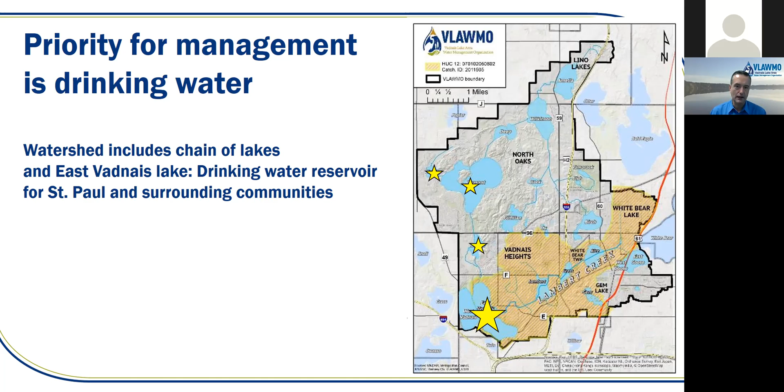The key priority for the Lambert Lake subwatershed, as you can see, that's located in the brown part, about the lower third of our watershed. It's called the Lambert Creek subwatershed. And really the priority for this entire management area is drinking water. The star that you see there is East Vadnais Lake. It is the reservoir that the St. Paul Water Utility draws their water out of for drinking water for 450,000 people in the St. Paul Water Utility area.

And because of that, we've really worked over the last several decades to do multiple high impact regional projects, including multiple reservoirs that we will show you in a few slides, as well as other rain gardens, other treatments in an innovative way related to shoreline and stream banks.

The Lambert Lake project was a multi-purpose partnership project, including partners, including the city of Vadnais Heights, SEH Engineering, University of Minnesota, Pollution Control Agency, Minnesota Department of Natural Resources, and St. Paul Water Utility.

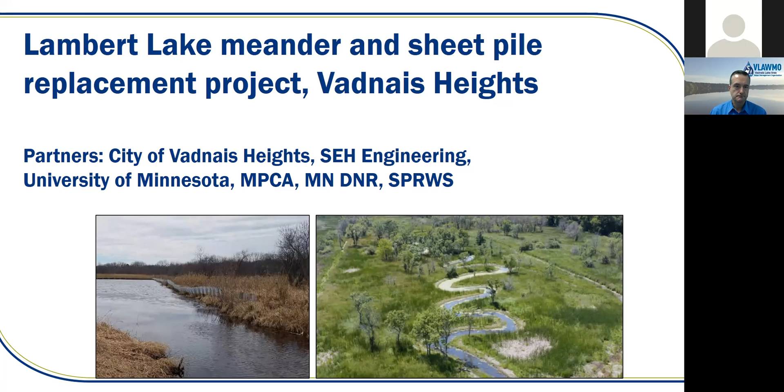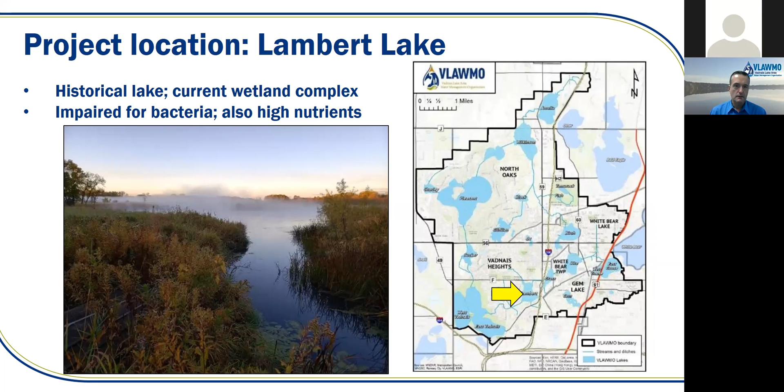The project location you can see on this arrow is about a quarter square mile lake called Lambert Lake. It's the last stop about a mile away from that East Vadnais Lake, and is really a creek that is also a ditch. So we have not only a creek, but we're managing it as Ramsey County Ditch 14 as well. We've got huge floodplain areas in this location, as well as a drainage, need to manage it as a drainage ditch, and of course as a water quality opportunity as well. Next slide.

You can see this is really the key storyline for this project: this is the last stop for a multi-purpose regional project before the water is discharged to East Vadnais Lake for drinking water. The creek is impaired for bacteria and also has very high nutrient loads. And we knew through multiple regional planning over the last several decades that this was the last stop for treating water before it got to that reservoir.

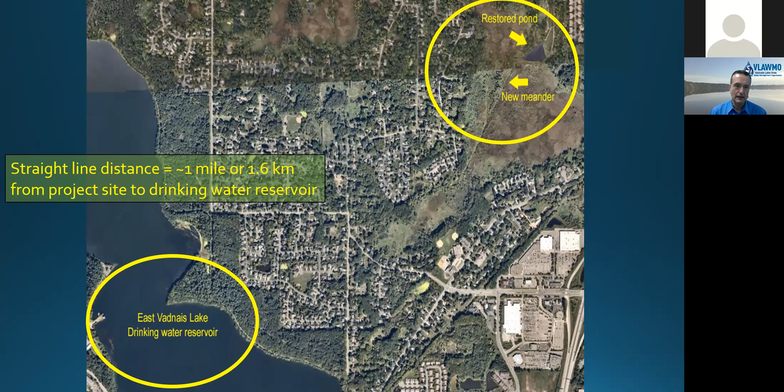And we really needed to attempt to do a project that treated the water quality, managed the floodplain, provided drainage for the upstream residents. And that's what we're so excited to share with you today. So now Dawn is going to talk about some of the project planning design, and then Emily will talk about implementation, and I'll come back to wrap it up at the end.

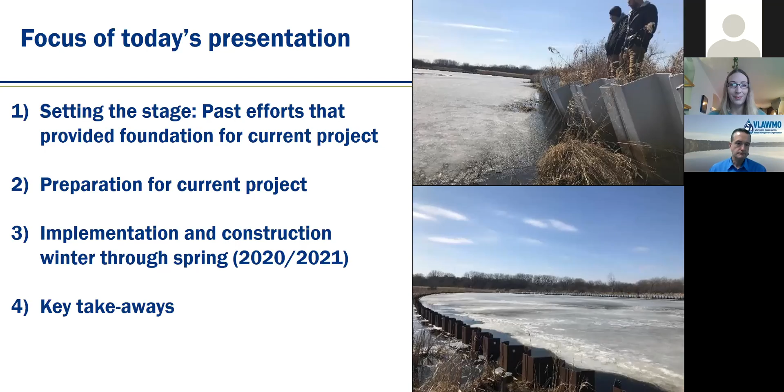So we begin by setting the stage. Past efforts have consisted of numerous projects with many partners. An important and consistent partner on these projects has been the St. Paul Regional Water Services. Past efforts include construction of a chain of weirs on the creek starting in 1993. Part of that project network included building flumes at 4 key locations to measure flow manually on the creek at that time. And those projects also included building a stormwater pond at Lambert Lake that you see on this illustration and realigning the ditch in 2005.

The project in 2005 helped to pave the way for our current project because it included the purchase of 5 perpetual easements on private property for ongoing maintenance of stormwater infrastructure and utilized the 40-acre City of Vadnais Heights owned parcel that's labeled 0 on this slide from the Ramsey County property map. It also established permitting that facilitated permits for this round of projects at the site.

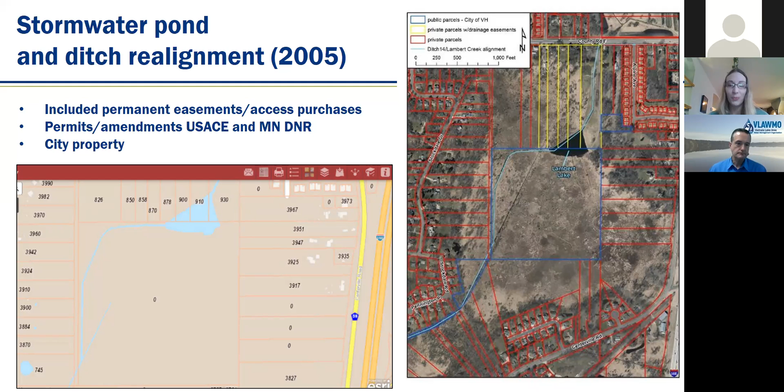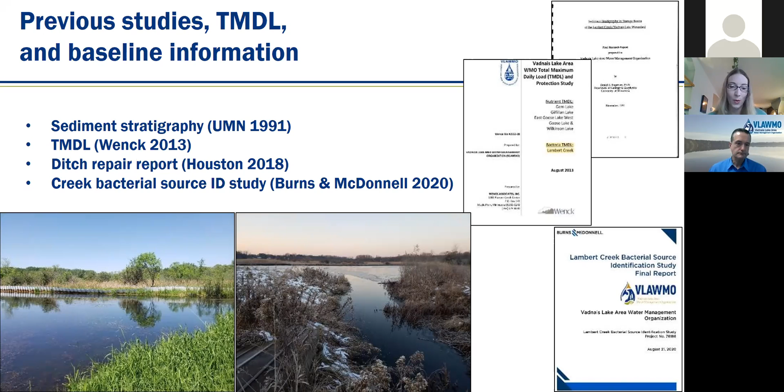Numerous studies have been done in the past to help inform our current management strategies. Going back to 1991, there was a very detailed sediment stratigraphy study done on the creek. A TMDL was completed in 2013 with a focus on the bacteria impairment. A ditch repair report was completed in 2018, identifying key areas of needed maintenance that we've been working on in the watershed. And a bacterial source identification study was conducted from 2014 to 2017, with a final report completed in 2020. The bacteria identification study had 2 main components.

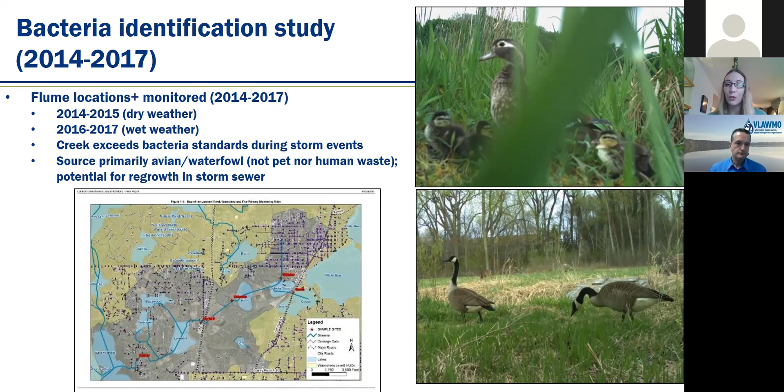The first was in 2014 and 2015, focusing on dry weather conditions. The creek was not found to be exceeding standards during dry weather. In 2016 and 2017, wet weather was the focus, and that's when we did see exceedance of standards, especially in the first flush of storm events. So that's a real focus for us as we look at the biochar filter. This study also looked at identification of the bacterial source, and it was found to be avian, which helps to inform our strategies as opposed to pet waste or human waste that were also possibilities that were investigated.

That report highlighted some of the projects that have been completed already to help improve the creek, and the full report is available on our website, or you could contact us for it if you'd like to receive a copy. We'd be happy to provide that for you.

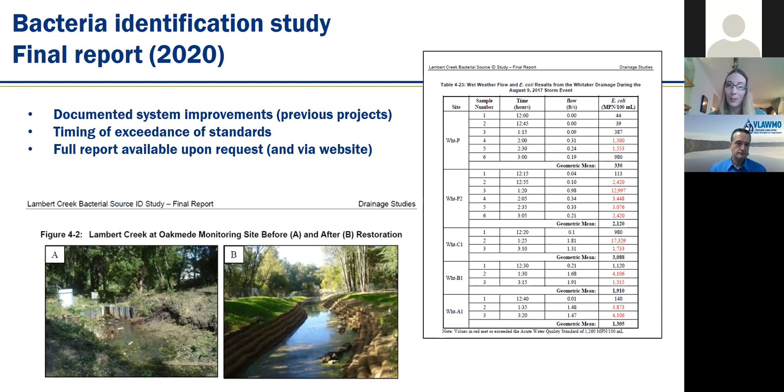When we looked at it in 2018 with the contractor, they gave us 2 years before they thought replacement would be imperative. So we got to work. We met with University of Minnesota researchers to expand upon the infrastructure replacement that we knew we needed, and to ask them to help us identify innovative site-appropriate BMPs that could be constructed along with the replacement. We also applied for grant funds for the new BMPs that included the meander and the biochar filter, and we applied for a 0% interest loan for the sheet pile replacement because maintenance needs were not grant eligible. We were awarded our funding in late 2019.

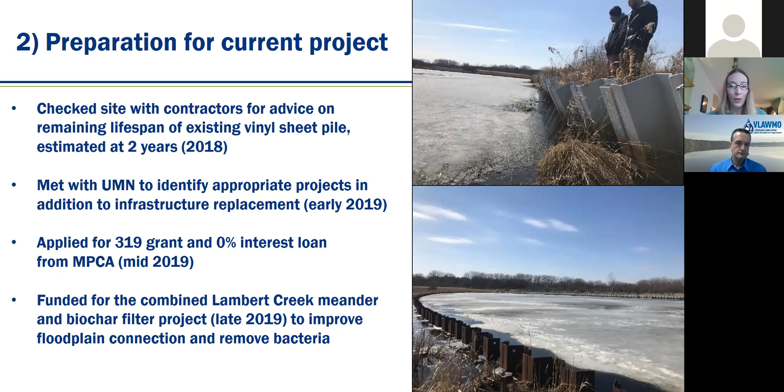Data are available real time and go back to the installation. They are available for anyone to download at Monitor My Watershed. There's a crowdsourced website there where you could download the data if you're interested in checking it out. And that's been very helpful for us as well.

We worked with the University of Minnesota faculty also to do a winter drone flight with frozen conditions in the wetland area to look for any areas of groundwater upwelling that could destabilize parts of the new meander path if we didn't investigate and identify those first.

We conducted wildlife monitoring of indicator species for water quality. We conducted it before construction to see how river otters are responding to habitat improvements at the site. That work is highlighted and formed a foundation for our story maps, including a citizen science otter activity reporting map that is allowing us to compile and share otter activity watershed-wide.

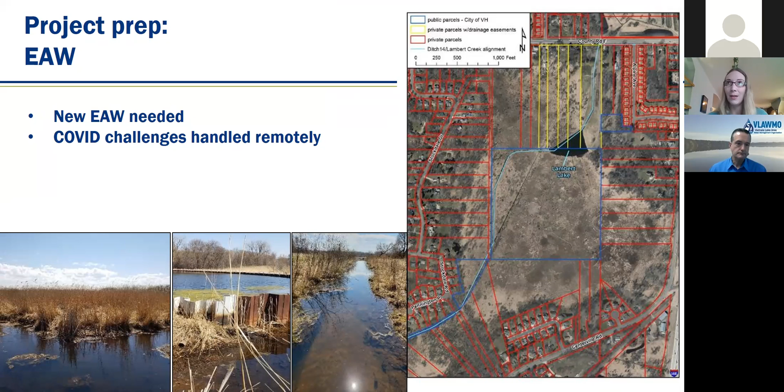We had some nice foundation information in place for permitting, but the project was different enough from the previous work that we needed a new environmental assessment worksheet. We worked closely with DNR to be able to do that, and we really appreciated the help from the great professionals there. We had COVID challenges because at that time site visits were not being allowed. So we worked to handle that remotely by photographing habitat conditions and working closely with DNR staff to help conduct our EAW and evaluate any accommodations needed for species of concern remotely.

We detected invasive Phragmites on the edge of the project area in a resident's backyard as part of our checks leading up to the construction. We worked with partners, including the University of Minnesota and Ramsey County, to report the infestation that was treated this fall. This is especially important because this Phragmites infestation is right on the edge of the wetland complex that has extensive stands of native Phragmites. So it was very important that we address this while it was still small and easy to treat.

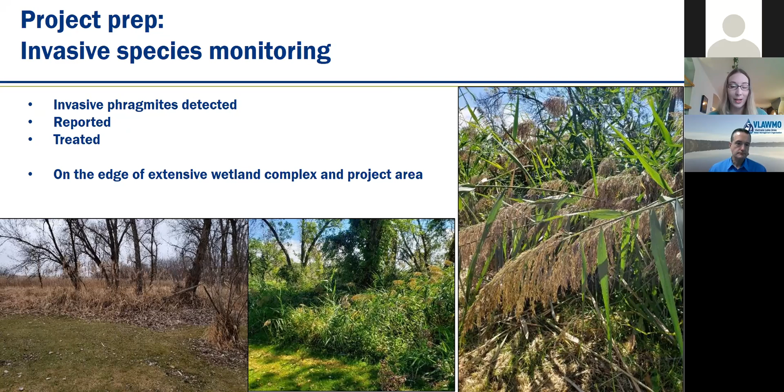We worked with SEH to plan and convene a required pre-bid meeting for our construction so that any contractors submitting bids had to have visited the site and also submitted example projects showing that they had experience working in fragile wetland habitats and completing similar projects. And at this point, I'm going to turn the presentation over to Emily, who will talk more about the sheet pile replacement preparation, the meander design, and implementation and construction.

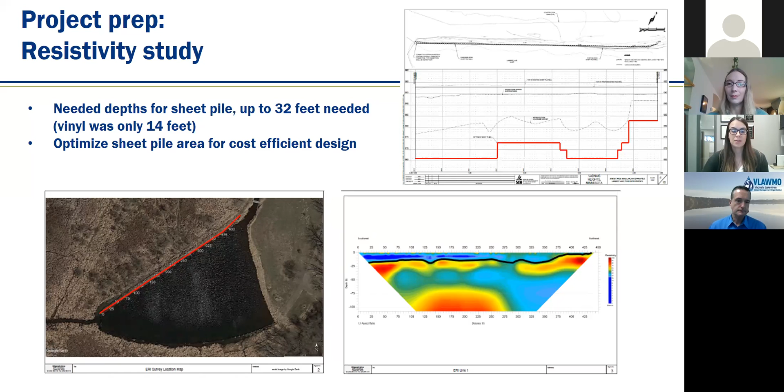So with this information, we were able to design the sheet pile wall to the greatest depth that we need, which was 32 feet deep. In comparison, the pre-project wall was 14 feet deep, but our proposed wall was 32 feet deep at its deepest point. So quite a bit of difference there. We were able to find areas where it wasn't necessary to go that deep. You can see that in the top right image with the red line that zigzags up and down. That is actually the bottom of the new sheet pile wall. So you can see how we were able to optimize material use and have some cost savings. Next slide, please. Thank you.

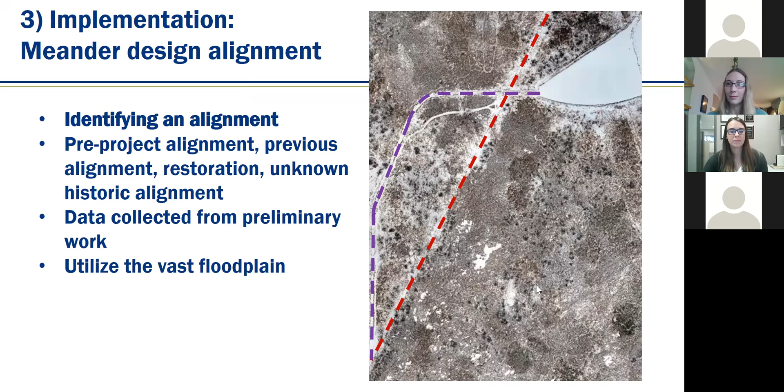Another really important piece for meander design was to identify a cross section for the proposed meander. Again, one of our big design goals here was to connect this system to that floodplain. However, we needed to be very sensitive to upstream flooding concerns that not only existed on the main stem, but also that branch ditch that I just talked about. So really any reduction in capacity in any way needed to be evaluated very closely.

So to get a really good understanding of the flow characteristics of Lambert Creek, we visited the creek at several locations, both up and downstream of our project area, got a good understanding of the drainage characteristics and really how they change as that drainage area increases.

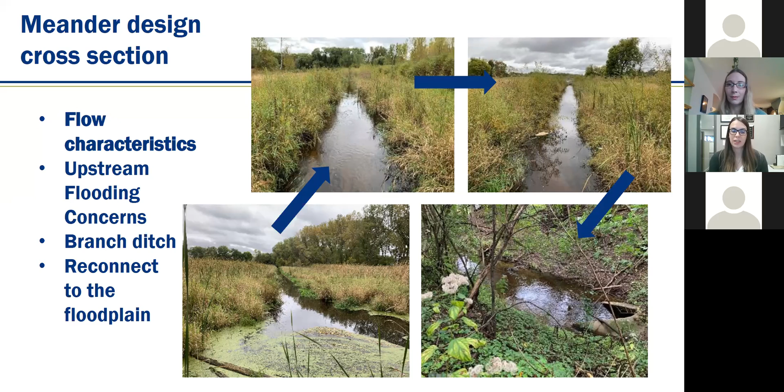However, like I mentioned earlier, we didn't have that historic ditch alignment information that we needed. So we needed to further justify our design with a reference reach. So a reference reach was us finding a similar conveyance with those same characteristics to kind of justify that design. So we actually looked at 2 reference reaches for this project.

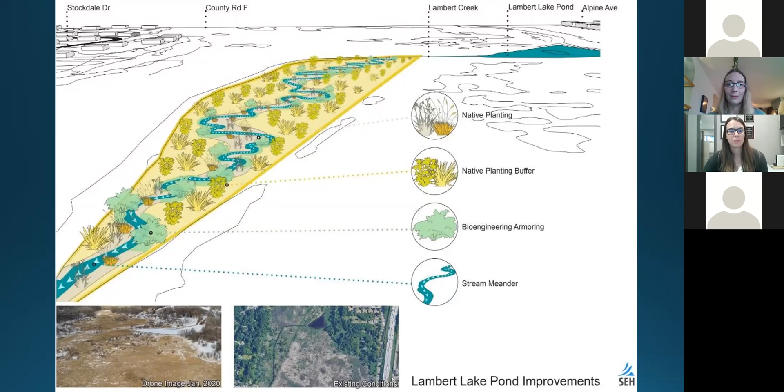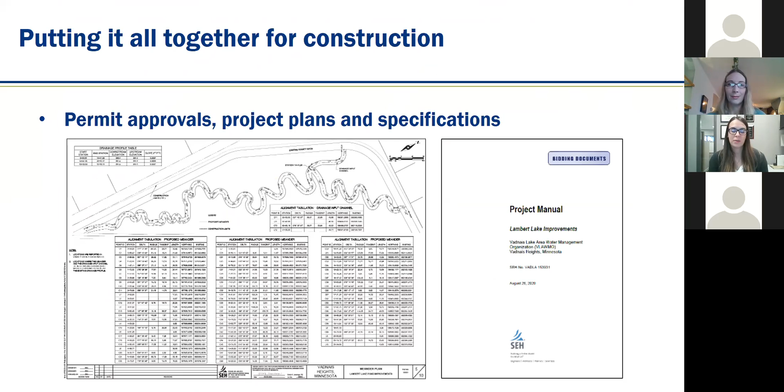So when we had our design, it was time to put it all together. So we prepared a set of plans. The screenshot of the plans you see here, that's actually our stream alignment plan. And we also prepared a project manual and specifications.

The project was awarded for construction in October of 2020. And I think the contractor was really hopeful to begin construction in December. However, December of 2020 was unusually warm. So we didn't get that good frost that we wanted to sort of minimize our impacts out on site. But the project did eventually get started in January.

Oops, can you go back one slide for me, Don?

Thank you. So the project, the major excavation and sheet pile activities per the contract were set to be finished by March 1st. So those early project delays put a little pressure on us, but the reason why we wanted to have that March 1st deadline is because we knew we really only had a short weather sweet spot where we could get in and get out and really minimize those impacts.

So as construction began, we did face a couple early challenges, and those included minimizing our tree impacts. You can see in the graphic here, there's some mature trees that are fairly close to our cross section of the meander. So wherever possible, we tried to maintain the trees. Again, they provided a lot of stability to the banks. They provided a good look for aesthetics and habitat, but they also helped us minimize our construction cost.

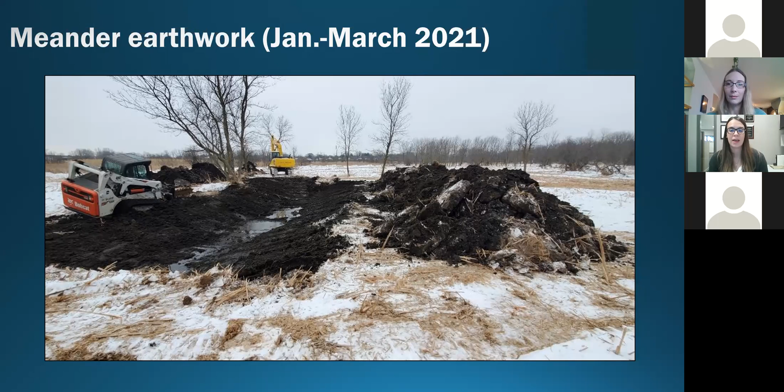So like I mentioned, work was really heavy there in January through March. And then after March, with the major earthwork activities done, the focus was really on site stabilization. So just a couple cool key erosion control components that were included in this project.

So the first of them being that the bank stabilization actually occurred concurrently with the excavation, and the contractor constructed the meander from upstream to downstream, but they actually left the first 50 to 100 feet not excavated. So the whole time that they were constructing, the meander was not online. So this allowed us to stabilize those banks and perform construction without battling that active flow. And that really helped with the erosion control efforts.

Another key restoration piece, like I mentioned, we removed some trees on site. We actually used some removed willows to help with those transition areas and act as vegetative armor for some of the ditch plug areas where we are transitioning from those previous pre-project ditch alignments to our new ditch alignment. Another thing you can see in this image on the left side is how we incorporated some of those trees. We're able to work around them and keep them in place.

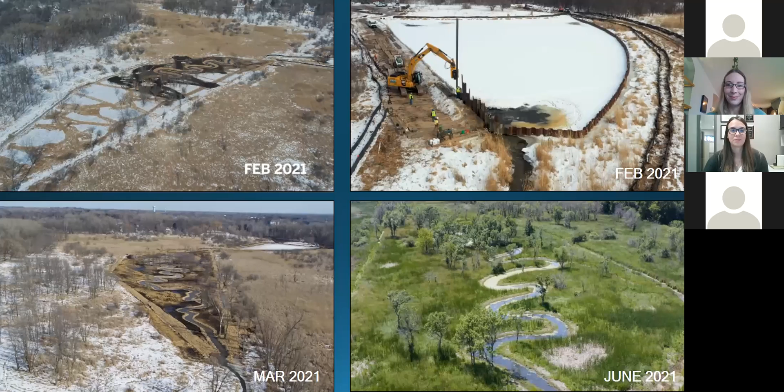Yeah, we have a few cumulative slides for you about the results of the project. And one of those final ones is that the lineal feet of the meander was 2,020 feet with 400 lineal feet of sheet pile. Our estimated load reductions have been done by modeling so far. We'll be doing some field checking of those next year following completion of the biochar filter. We have an estimated phosphorus load reduction of 190 pounds per year and TSS of 3.5 tons per year, with the additional benefits of water storage and climate resilience.

The project was a combination of grant funds with in-kind contribution and the 0% interest loan. The grant funded portion of the project was about $504,000 and the 0% interest loan for the sheet pile replacement was $400,000. So we're looking at about a $1 million project here.

With that, I am momentarily going to stop the share, and I'm going to switch over to a video. We have an overview video that has music. So you should hear the music in the background, but there's no talking over it. And you can see the construction of the meander from beginning to end, also including some of the sheet pile work. So I'm going to stop the share there and go back.

When we tested this yesterday, using the smaller view on the thumbnail worked better. The video wasn't choppy. So I hope that you're going to see this really clearly. And I'm just going to be quiet for 2 minutes and 54 seconds.

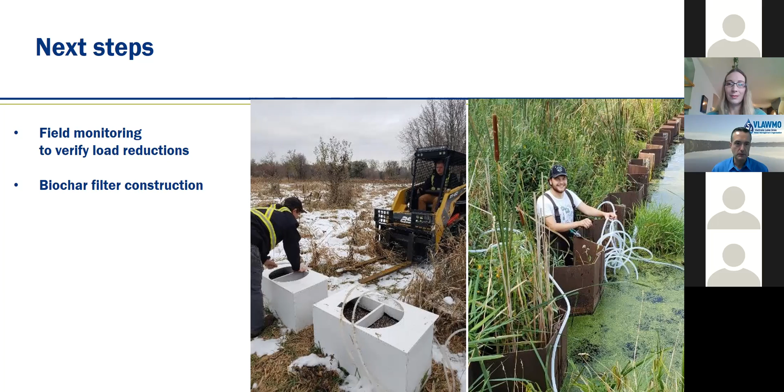Thanks, Dawn. The next steps for this Lambert Lake project is, as Dawn mentioned, we'll do field monitoring this next season and the next few seasons to verify those loads and project outcomes and benefits numerically. The other part of the project that we did not mention, that we will be constructing next fall and winter about a mile east of this project, is a biochar filter to, again, address some of the bacteria impairment of this creek. And we're looking forward to proceeding with that.

So some key takeaways that we mentioned is to have clear communication with partners. We worked really hard in development of websites, open houses, and making sure to have clear upfront proactive communication. We worked really hard because it's a multi-purpose project. We had numerous permitting hurdles. We tried to work as proactively as possible with that.

Second one is it's a regional planning exercise. We've had about 30 years, as you've heard, of regional planning, believe it or not, to identify that this is really the capstone project or one of the key capstone projects of this entire creek network. And we knew that this was the last stop where we could build a high impact multi-purpose regional project before it hit the East Vadnais Lake and the drinking water supply network for the St. Paul Water Utility.

The third takeaway is that, as I mentioned, this is really a multi-purpose project. It involves water quality, water quantity, ditch management, flood management, and wildlife habitat. It really gives us the best bang for the buck and really helped us in defining, in the years before design started, the key engineering and technical studies that we had to conduct, and you heard many of them today. This was not just a design and build type project. We had to do years of engineering and technical work, geotechnical survey, modeling, monitoring, just to name a few.